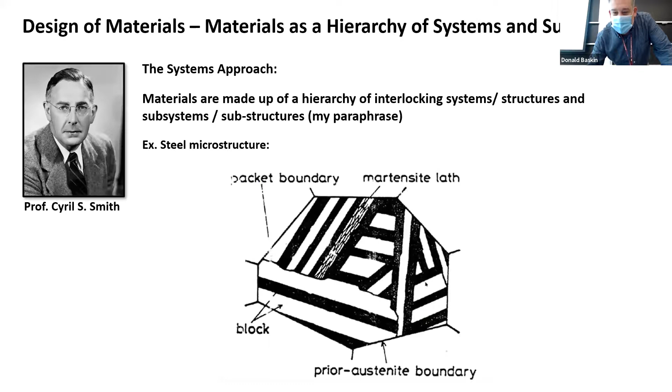CME, computational materials engineering: computer models and thermochemical databases that run those models to predict what's going to happen during the different links, the processing to structure and structure to properties links.

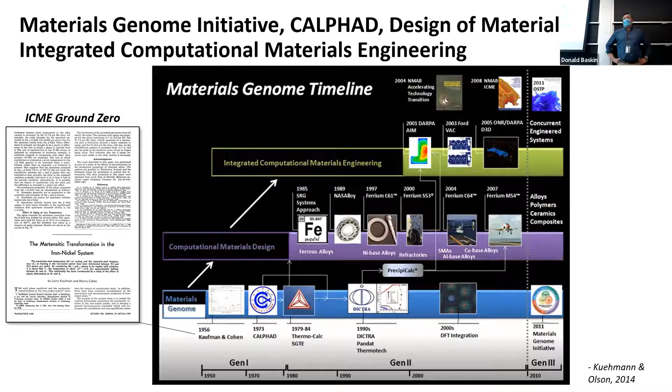ICME, the 'I' I'm personally a little confused with, it depends who you talk to. A lot of people talk about the 'I' being the ease with which the inputs and outputs from the various models can feed into different models, and whether there's a lot of human intervention needed to go in and change formats and things to get different computer models to read the output from previous models.

Okay, we talked about the Olson diagram. This is a different type of representation of the processing structure property performance relationships. This is a way of incorporating Cyril Smith's philosophy of systems, a hierarchical systems of systems and subsystems, all working together to optimize the properties of the material.

On the far left there, these are the processes. These can be various different steps of the process - these can be mixing chemicals, these can be deoxidizing, taking sulfur out, these can be solution treating, quenching, tempering, etc. All the different processes you might do with a material in order to achieve the structure.

And the structure is the one in the center. There can be many different features that make up a material structure, a hierarchy of subsystems. So there's atoms, there's interstitial atoms, there's precipitates, there's grains. We talked about inclusions a lot last week or yesterday.

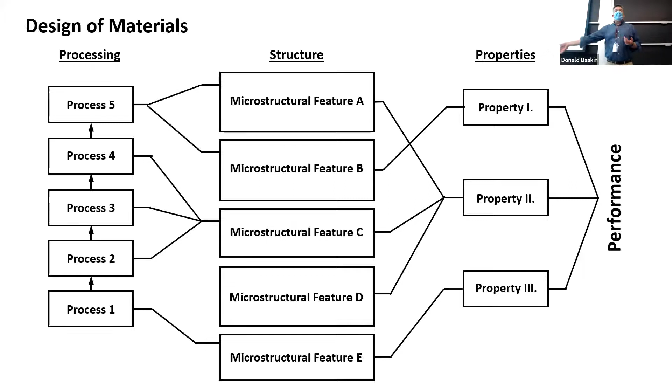These structural subsystems work together to provide a system of properties. The properties that are most interesting to us right now, that we're going to focus on this class to maximize lightweighting, are the specific strength and the specific stiffness. We're going to focus on the structures that get us those, and then the processes that give us those structures.

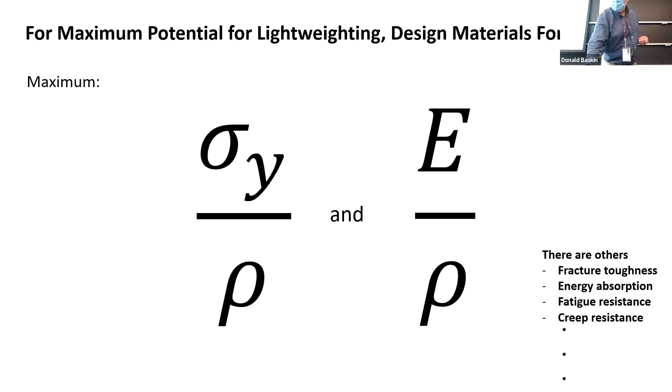So back to this one. The first thing we're gonna focus on right here is strength to density. Later we'll talk about stiffness to density. A good first pass to find a material that has the best specific strength properties is to look at the Ashby diagram - this is a graph or a map of strength versus density.

You're looking for materials that are in the upper - I screwed this up last time - the upper left corner, or close to the upper left corner. The closer you can get to the upper left-hand corner, the higher the strength to density ratio, the highest potential for that material to make a lightweight structure.

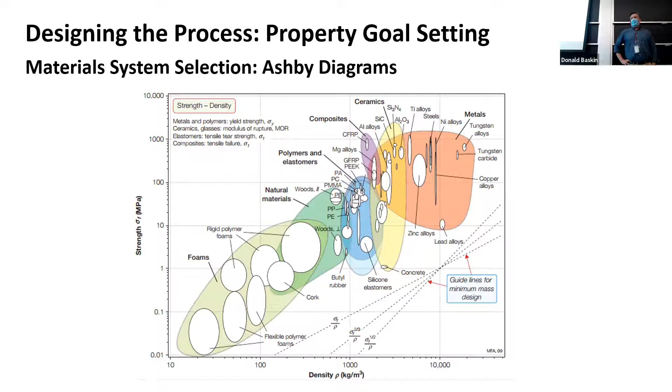Goal setting is important. You can set rational goals for how you can design a material to achieve a certain level of properties. You can't make wood that has a 10 gigapascal yield strength - that's impossible.

But what you can do is look at existing materials and understand: if this material has a high strength and this material has a high toughness, and there's this subsystem of the microstructure that's giving you the high toughness in one material, and in the second material there's this other subsystem that's giving you the high strength - can you then make a material somehow that's got both of those microstructural features and potentially have high strength and high fracture toughness? That's really designing materials.

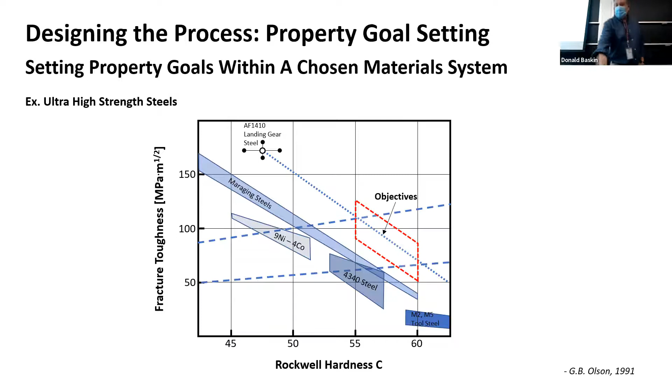There are stringers - manganese sulfide sunk the Titanic, I always tell people that. We talked about that last time: back then when they made the Titanic, they didn't really understand the deleterious effects of sulfur in steel, so they didn't purify it out, and as a result they got these manganese sulfide stringers. This makes the steel brittle, especially at low temperature. So when the Titanic hit the iceberg, it was cold - they had a brittle fracture, and then all those side plates that contacted the iceberg opened up and let in all the water, and then it sank.

It's interesting, during World War II, there's another story. The Navy had a bunch of ships made called the Liberty ships. I guess they either didn't know or cheaped out on the steel, and they had a lot of sulfur stringers in the steel. If you go online and Google Liberty ship, you'll see ships that literally cracked in half, like sitting at a port in Lake Superior, cracked in half right down the middle. They're pretty scary. They had built probably hundreds or maybe thousands of these ships, and they would crack in half because the steel they used had too much sulfur in it.

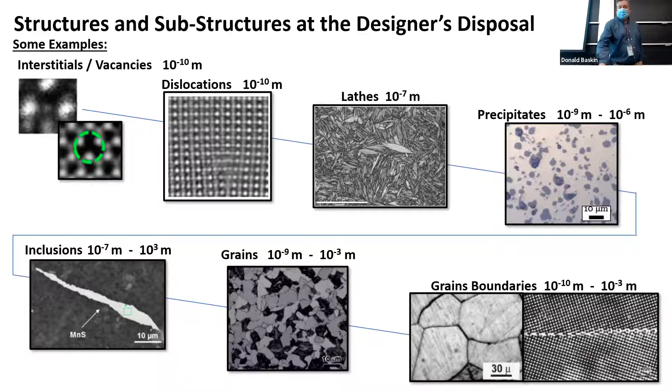We then talked about dislocations. A dislocation is a missing column of atoms in a lattice, and they explain why metals, for example, are not as strong as their theoretical strength. Because if you look at the calculation that shows how much energy it takes to pull two atoms apart, and then expand that to see what's the strength of this material based on that energy to take these atoms apart, materials should be a hell of a lot stronger than they are.

But it also gives us an ability to design a material that would be stronger, because if you can find a way to make it require more energy to move this dislocation through the lattice, that's really strengthening. That's really the essence of what strengthening is. So most of the research and work and grad students slaving away has been about trying to find ways to increase the energy to move dislocations through the lattice.

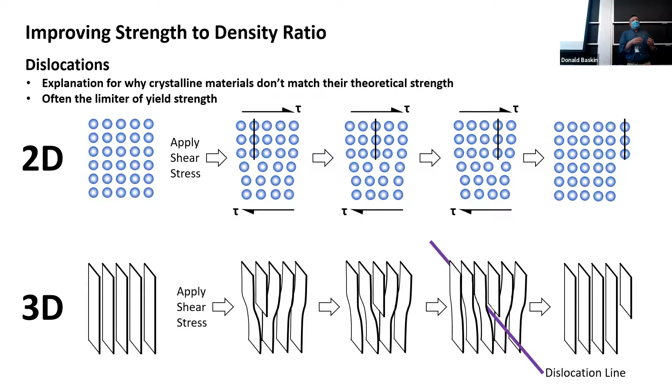Strengthening mechanisms. At the end of the class yesterday, we began to go through some of the strengthening mechanisms. These strengthening mechanisms are designed to make it more difficult for dislocations to move through the lattice. We talked about work hardening as the first one we spoke about.

If you take a paper clip and bend it a couple times back and forth, you'll notice it gets a little bit harder each time to bend it. What's happening there is that as you bend it, the dislocations, some are moving and they're tangling up on each other, so they can't move any further because they're tangled up on one another. Even worse, as you do this, new dislocations are formed as you're bending it, so there's more and more of these dislocations piling up on top of one another, stopping each other from moving.

And that's strengthening. It always surprises me that there's like kilometers of dislocation line in a lattice, in a metal that's been deformed like that. When you think about a little cube, maybe centimeter by centimeter by centimeter, there's like a kilometer of dislocation line. It never ceases to amaze me.

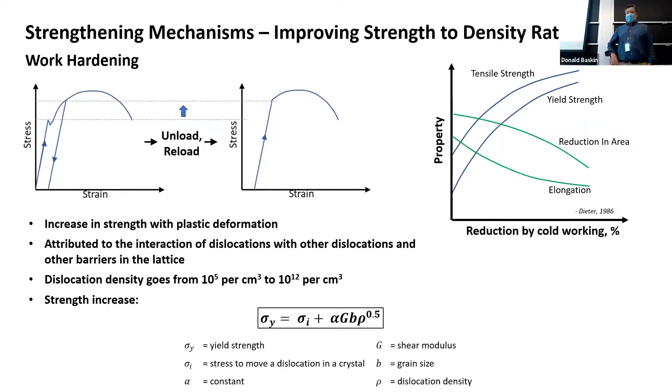There's an equation shown here that relates the increase in strength with the dislocation density, and some other variables, grain size and so forth, to predict what the strengthening is associated with work hardening. We also talked about substitutional strengthening. If you have a lattice of atoms, say they're all the same, called the solvent, and then you can replace some of these atoms with a new atom, that's called substitutional strengthening.

Sometimes the atoms, if they're small enough, they'll fit between the solute, the thing you're alloying it with. Sometimes they're small enough that they sit in the interstices between the atoms, and that's another way to stop dislocations from moving. When you get a little atom and stick it between other atoms, it causes what's called a lattice distortion, and that lattice distortion increases the energy required to move dislocations through the material.

There's been studies done on if you have this solvent material and you put in this solute, can you predict whether it's going to sit at a lattice site, or can you predict whether it's going to sit in an interstice? There's a lot of modeling done around this, and some general rules of thumb about percentage of the atomic radius. I think the rule says that if the radius of the solute is within 15% of the radius of the solvent atom, then it will sit in a lattice position, a substitutional atom.

If it's smaller than that, it'll sit in between. So it turns out that when they sit in between the atoms in the interstices, they actually increase strength more than if they occupy a lattice position. Steel is a material that is strengthened through interstitial strengthening, so the little carbon atoms sit in between the iron atoms. Brass is a material where the solute occupies a solvent position in the lattice.

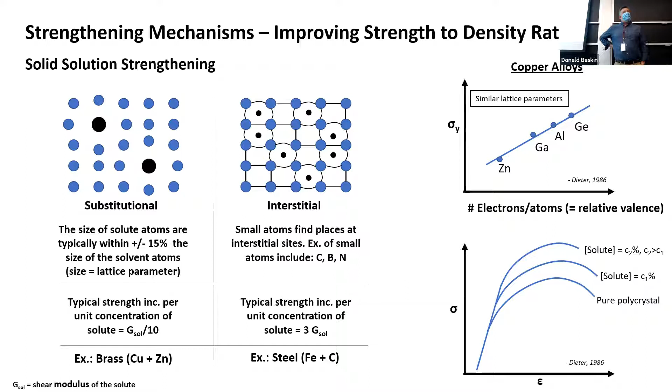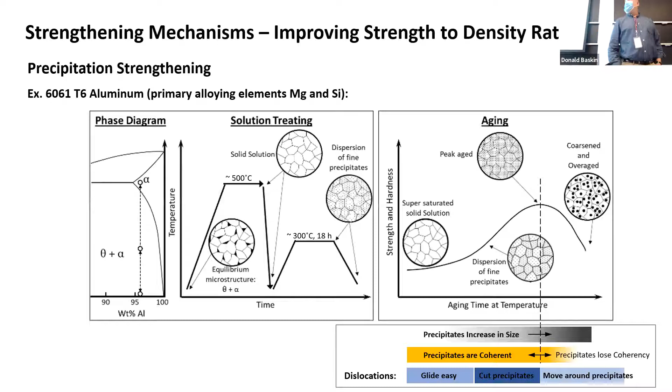Precipitation strengthening is very important. I think this is one of the most effective ways to strengthen a metal. 6061 aluminum, 7000 series aluminum, 2000 series aluminum—these materials are all precipitation strengthened. There are also some steels, some really high performance steels, that are strengthened by this mechanism.

The danger in this is that there's a certain size at which the precipitates are most effective at strengthening. If these precipitates grow with temperature—time, temperature, these things will actually begin to grow—if they get too big, they don't strengthen as well.

So you take a material like a 6000 series aluminum, and then you heat this material up, all the atoms start moving around a lot, and you get a solid solution. You quench it, still a solid solution, but it's frozen out at a lower temperature. Then as you start heating this material up, the precipitates will begin to grow, kind of like raisins in bread, let's say. They'll begin to grow in the material, okay?

And they'll keep growing the longer you heat them, okay? The higher the temperature, the size they grow to is a function of those two variables, the time and the temperature. They can get too big, like I mentioned, and then they don't work as well. And I can explain why that is.

We talked about this guy right here. This is when the precipitates are small enough and a dislocation is moving towards a precipitate in the material. By the way, the precipitate could be like a metal carbide, for example, like we call them M2C—M is metal, C is carbon, so M2C, two metal atoms to each carbon atom. Right? That's an example of a precipitate.

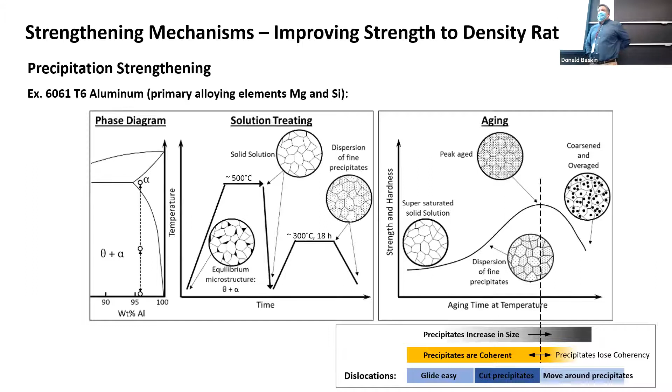I have a question about precipitate size. Why is it that when I have bigger precipitates, they loop around? Because in my mind, if I have a big precipitate and the dislocation comes, it has to bend a lot more to come all the way around it, so it would be way harder for it to loop around. It's like a surface area thing rather than just cutting through it, so in my mind I would have expected the opposite.

Yeah. What's your name? Julian. Julian.

I see your logic, and it does make sense to me, but the reality is that when the precipitates get bigger, the dislocations loop around. I can't tell you the thermodynamics of it—Professor Shu probably could. I can read up and get back to you next week, but it's an interesting question. You would think that since there's energy associated with this missing column of atoms, looping them around a precipitate would mean a longer dislocation line, which would mean more energy. But would that be balanced by how far they have to cut through? Could that be worse? It could be, yeah, and there's also the lattice distortion.

Amelia? Oh, actually, I have a second question. Yeah.

Okay, real quick, just want to make sure everyone understands this. As these precipitates get bigger, it takes more energy to get a dislocation to cut through them, and that's an increase in strength. There's a point where they get so big that, whatever the thermodynamic reason, Julian, they wrap around. Then as that happens, as they get bigger, the strength begins to drop off. So the point where you're getting the most strengthening from the precipitates is some critical size. I can't tell you what that is off the top of my head, but it's probably different for different materials.

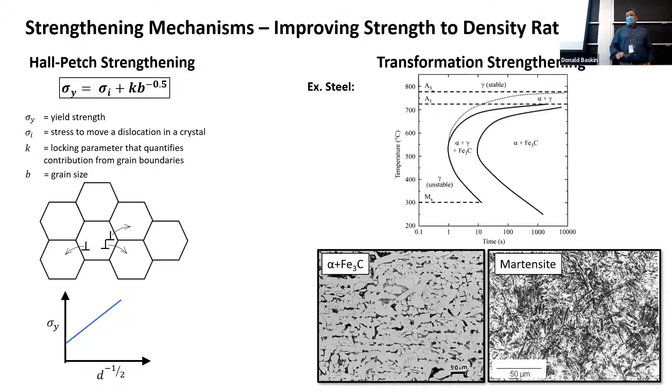Composite materials. Carbon fiber is lovely stuff. It's nice because even as an undergraduate working in a maker lab somewhere at MIT, you can laminate your own carbon fiber parts if you're so motivated and make little parts out of this.

Carbon fibers themselves are incredibly strong and incredibly stiff. And unfortunately, they're just really small and wiggly, so you can't do a lot with them unless you embed them in epoxy or some other polymer resin.

The resin serves to transfer load from the outside boundary to the fibers, so all the loading goes onto the fibers. Very little goes onto the actual epoxy. The epoxy or whatever the matrix is isn't that strong, but if you can effectively get the load onto the fibers, you can make materials that are incredibly stiff and incredibly strong at room temperature, or maybe a little above room temperature.

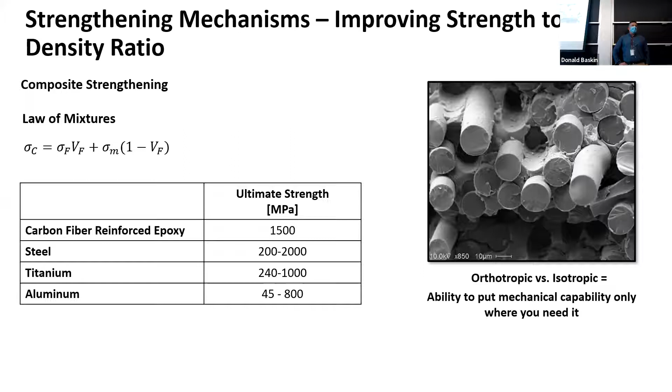Those types of materials aren't necessarily good for airframe components that see 2000 degrees Celsius. The matrix would burn off. So that's another strengthening mechanism.

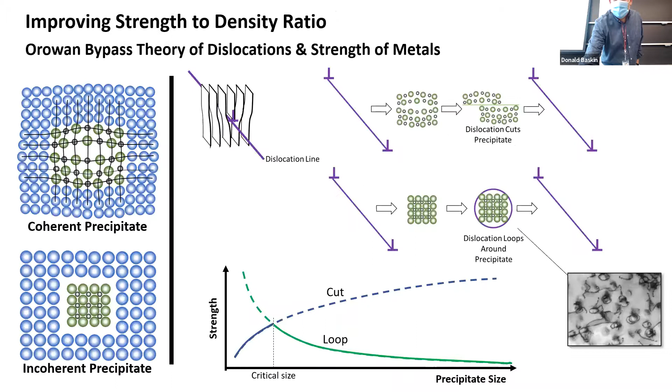So what I've given you here is a variety of different strengthening mechanisms. Most of these are for metals, granted. The composites could be metal, could be ceramic, could be polymer. These are microstructural systems and subsystems that a materials engineer has at their disposal to increase the strength of a material.

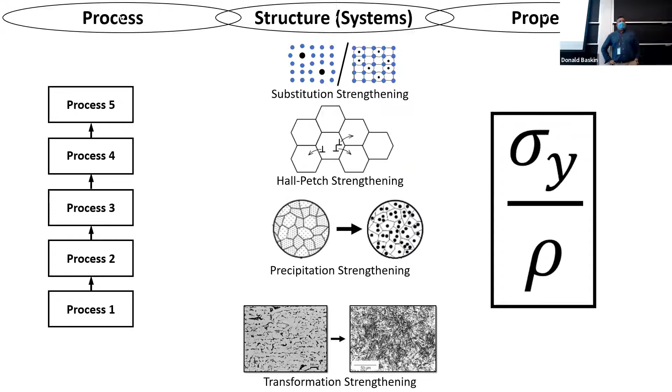The next question is how do we get those? So we're going to talk now about the processing to structure link.

Steel. We just talked about steel. Take a piece of steel that might be fresh from the mill, and you heat it up to 870 degrees, and it turns to austenite. You quench it down to room temperature or somewhere about there, and most of it will transform to martensite. Some of it will stay austenite, which can actually be useful in some cases. But you transform it to martensite, and the martensite is much stronger.

Martensite can be brittle, if it's too tight. So there's such a thing called tempered martensite. You may take that material after you've quenched it and heat it up again, which will grow the martensite laths a little bit bigger, so they're a little more forgiving when they see a crack. They don't split apart and become brittle. They stay ductile.

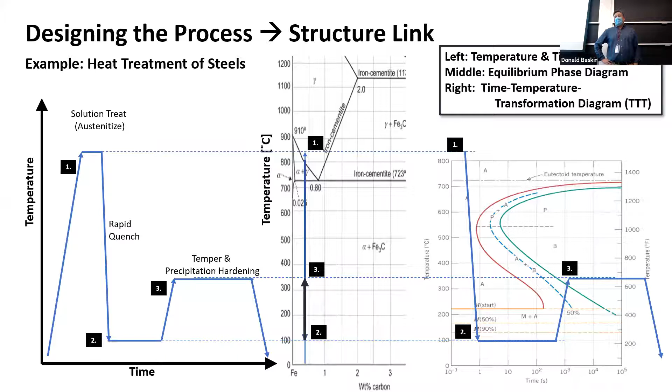So that's an example of filling in the processing to structure link. One example, okay? Here's another example. This one's going to be a little more confusing, and we've got 6 minutes left. Let me try to explain this one.

You have steel. The steel has a bunch of interesting elements in it: chromium, tungsten, molybdenum—this one is chromium and molybdenum—vanadium, nickel. The really high strength steels they use for things like airplane landing gear, gears in your car, and some really high-end bicycle parts are these high alloy steels.

It turns out that when you mix all this stuff together and do this heat treatment I just described—austenize, quench, temper the martensite so it's not quite as brittle—there are other treatments you can do that will grow precipitates depending on the alloy concentration of the material. They grow different types of precipitates.

And if you've ever used Thermocalc—has anyone ever used Thermocalc in here? Julian, have you used it? You too? Okay.

Thermocalc, when you say okay, I want to mix these 7 elements of materials together, and you press the go button, basically it'll give you a list sometimes of like 20 or 30 different possible phases that'll form. A precipitate is a phase, right?

So sometimes, for example, carbides are very effective at strengthening metals. Some carbides, not all, are. When you have 6 metals around next to a carbon, an M6C carbide precipitate, apparently those will deteriorate the strength of a metal. It has to do with corrosion, but I don't want to get too far into that.

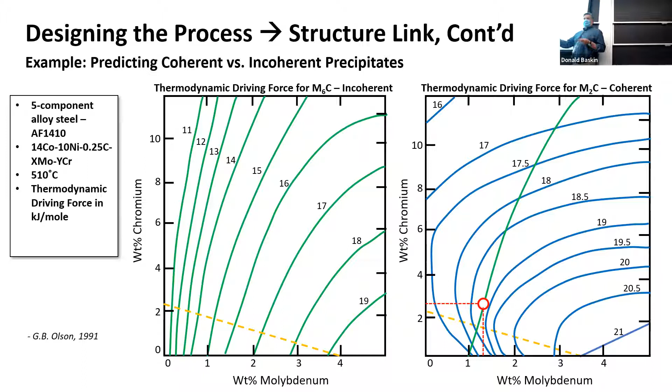Make sense? You guys want to take a second to breathe that in? Okay, you guys got that? Not seeing many shaking heads, huh? Okay, let's try it again.

So there's coherent precipitates and incoherent precipitates. Coherent ones mean the atomic planes line up; incoherent means they don't—it's almost like a little ball sticking in there that isn't really attached to the stuff around it. The M6C carbides are incoherent; there's also some corrosion effects that happen at a really small level. The M2C carbides are coherent.

In order to get preferentially one over the other, you pick the one that has the higher driving force, and then you want to maximize that driving force in order to form the finest dispersion of these precipitates.

So here we've got these two graphs. One of these is the contour plot for M2C carbides—that's this one here in blue—and then the green one is the driving force for the M6C. This yellow dotted line here represents the stoichiometric ratio for the material.

These are the compositions you can actually get—you can mix these different amounts of atoms together into the steel and get something along this line. You can't really deviate from this line; you have to be on it because of stoichiometric reasons.

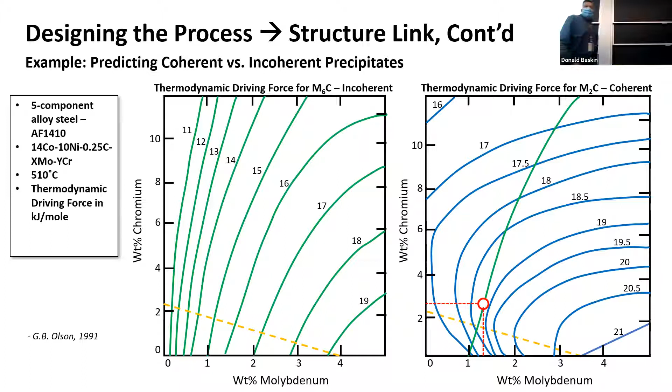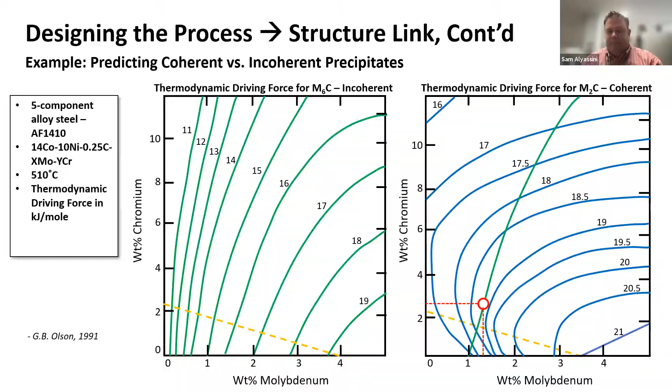Tim, Christian, do you guys have any questions? Not today, thank you. You good? Yep, all good. Thanks so much. Okay, bye. Take care. Bye.